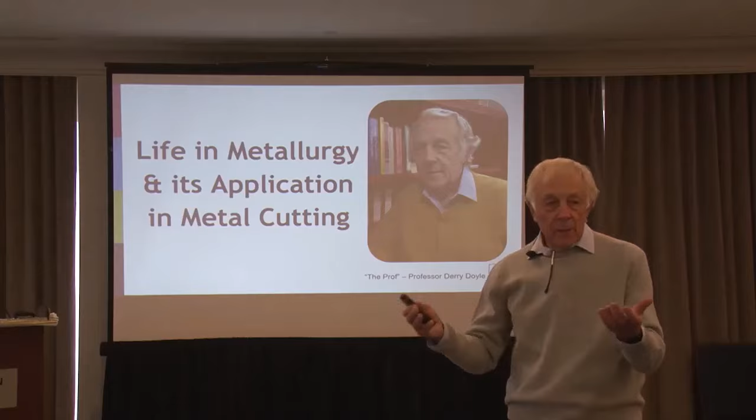Interestingly, metallurgy, metallurgy, we say things a little bit differently. Let me tell you a little story. When I was in Minneapolis with a great friend of mine, Professor Ramalingam, we were having lunch, and as I moved through the cafeteria, this lovely lady said to me, would I like some tomato with my lunch? I was being a little bit smart and said, well, I'm not sure, but I wouldn't mind some tomato. And she looked at me and said, well, I suppose you'd like some potato as well? So she got me, and that was just lovely. I've never forgotten that one.

So metallurgy, metallurgy. And if we have any other problems, please stop me and ask.

Now let's look at the background for our conversations for the next hour or so. The background, as Emma said, I have a background from the north of England, in particular Wigan, and... Hang on, let's do that bit again. Just go through the structure and then go into the background. Oh, okay, go through. Tell them what you're going to tell them. Go down and then go. And then go background. Okay.

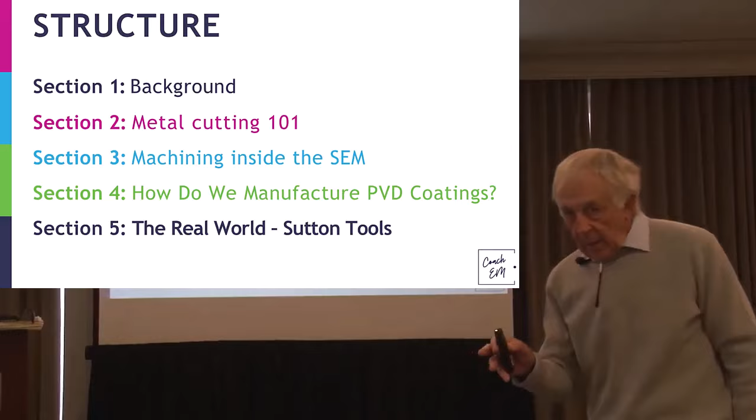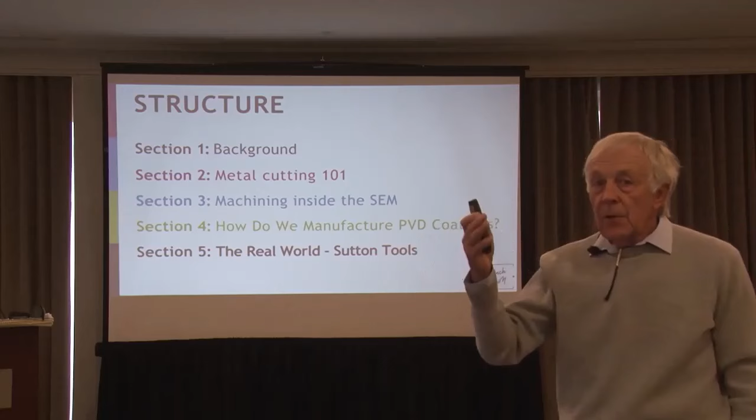Okay, the structure for this morning then is the background. For me, we're going to look at Metal Cutting 101. What do you find in the textbook? What does it say about cutting metals? And we're going to take something a little bit different, a little bit original, that we've got some sort of reputation for, and that is machining inside a scanning electron microscope, meaning we can look at the dynamics of chip formation at very high, 10,000 times magnification. And then how do we look at making coatings, PVD, physical vapor deposition, making coatings from the vapor state, and then we take all that into the real world, into Sutton Tools.

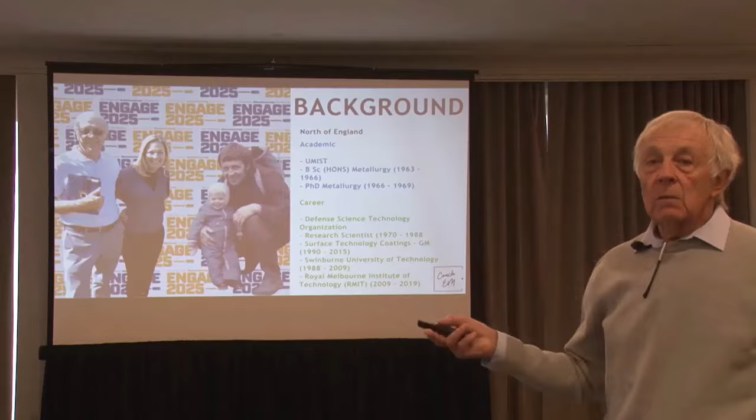Now, my academic background: I did my degrees in metallurgy at UMIST, University of Manchester Institute of Science and Technology. What a brand name, doesn't exist anymore, it's now just the University of Manchester. Big mistake in my view. Now, at UMIST I did a BSc and PhD in metallurgy.

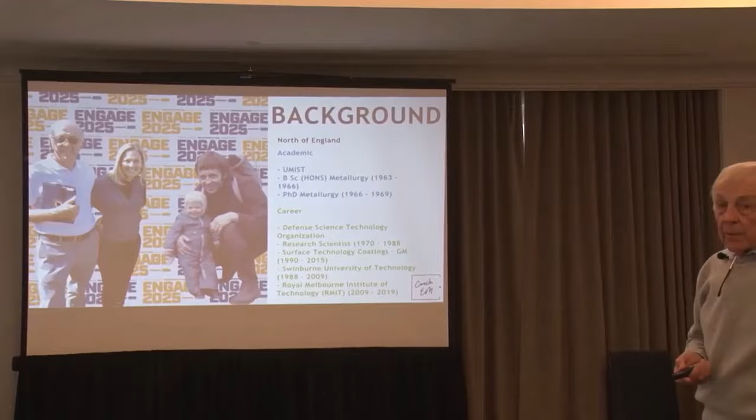My career from there was in defence in Australia, the Defence Science and Technology Organisation, for about 20 years as a research scientist. Then in 1988 I left defence and joined Sutton Tools, and we formed a company called Surface Technology Coatings, which still exists today. I also was a professor at Swinburne University of Technology and the Royal Melbourne Institute of Technology in Melbourne, 2009 to 2019. So that's roughly my career, one academic and two of the real world application.

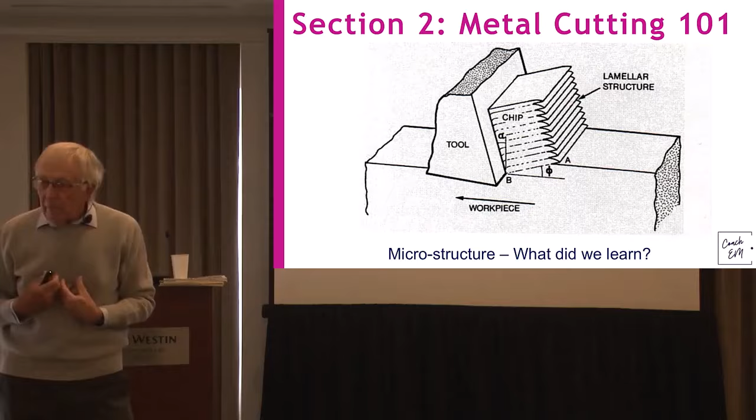So I'm a metallurgist, so it is a metallurgical theme from what I've got to say. In manufacturing, I have been involved in metal cutting, that's what's interested me. I've even done that in the universities, in the Commonwealth Scientific Organisation, in Cambridge, and in the real world. So we've covered everything. So well, let's start at the beginning. And please, hands up or contribute if I'm missing something or something that you've experienced.

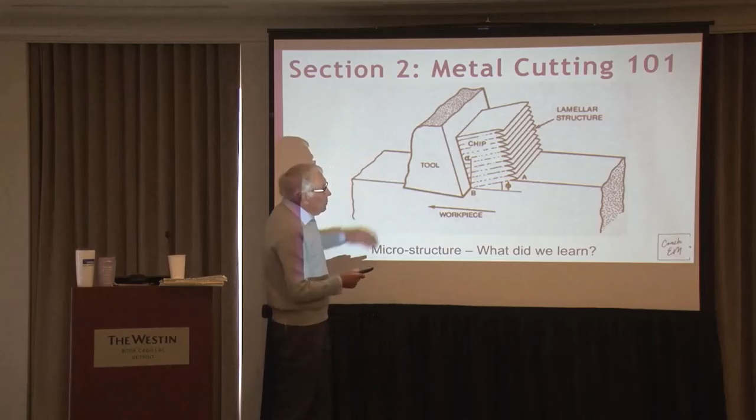This is a typical sort of image you might find in a textbook on metal cutting. Here we've got a cutting tool, there'd be a planing operation. We've got the workpiece and the chip, so they're the three things. The workpiece for us at the moment will be mild steel or copper or brass. The cutting tool, from where we are going, we're mainly talking about high-speed steel or tungsten carbide cobalt. So carbides, high-speed steel. Remember, as far as that cutting tool is concerned, we started off in the 1700s, 1800s with plain carbon steel tools, and they're very hard. And if you're a heat treater, do you remember what your heat treatment is for a plain carbon steel? You harden at about 800 to 900, you quench, and then you temper at about 200. Okay.

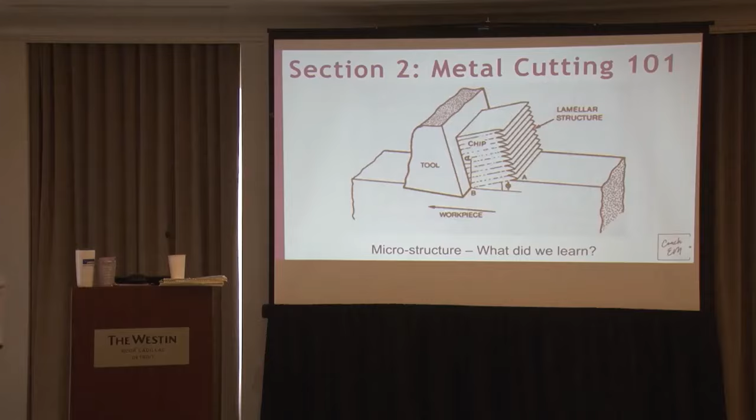Cutting speeds were 10, 20 feet a minute - not very much, but pretty good if you're in 1850, in that late 1800s. Americans played a big role - I got in trouble once for giving a talk saying it was all Americans, and got told off because the English also did a lot in heat treatment, what's called Mushet steel. But I think Taylor and White at the Bethlehem Steel Company made tremendous progress with what we call high-speed steel.

The composition was 18 tungsten, 4 chromium, 1 carbon. What's clever about Taylor and White, around 1900-1910, is they took the steel and hardened it not at 900, which everybody had been doing for 100 years - they went up to 1200. And when they tempered it, they didn't temper at 150, 200 - they tempered at 450. Those subtle changes didn't happen overnight, but they were tremendously important, and that high-speed steel is still one of our main tool steels today.

What's important about it is its ability to withstand the heat as that chip moves - does it slide? That's still very, very controversial. As that chip goes up the tool, it starts generating enormous heat, so that tool has to withstand the heat of sliding friction.

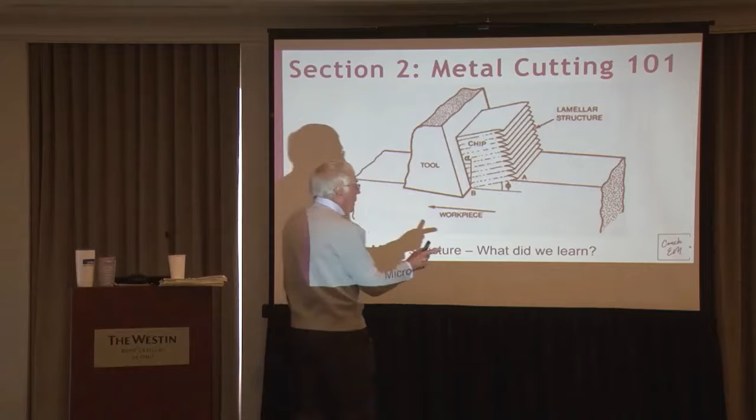I'll just say one thing, but you'll see it more. The intense deformation along there is important, and it's something I've written papers on - it's taken metallurgists a long time to really understand what's going on. But let me make one point: as the workpiece is coming along, there's an enormous normal force. If we're talking friction, that's an enormous force along there, and it's got to move up.

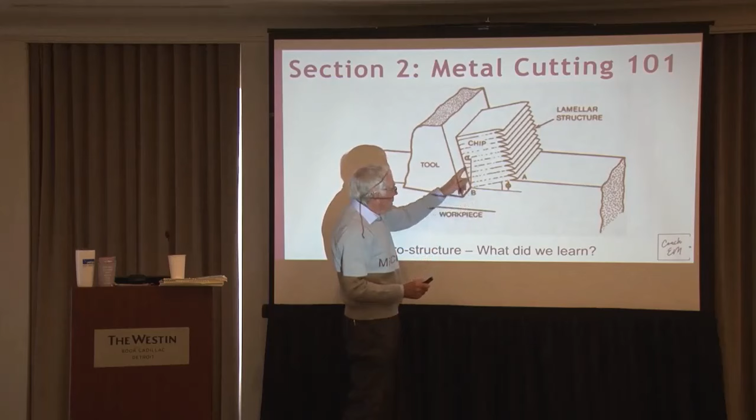It's not seeing any oxygen, and that's important to recognize. So when you're throwing your lubricants and oils at that area, you're lucky if you can even get in there - that's why you use pressure.

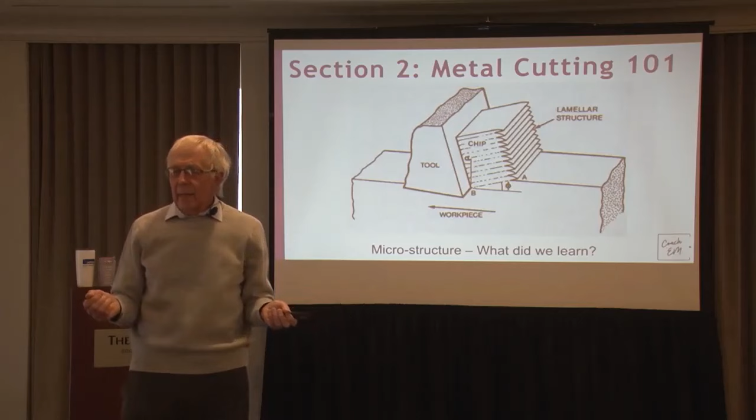Okay, now what does the metallurgist do? He or she comes along, starts cutting it up and looking at the microstructure. We love microstructure. We'll take a standard look at the microstructure, and what do we learn from that? A bit of 0.1% carbon steel, a nice bit of mild steel.

I like this one. We were very, very good metallurgists in the research labs I worked at - we had a super metallurgical laboratory. You see what we were saying about the deformation in the chip? You can see the shear, what we call the shear plane.

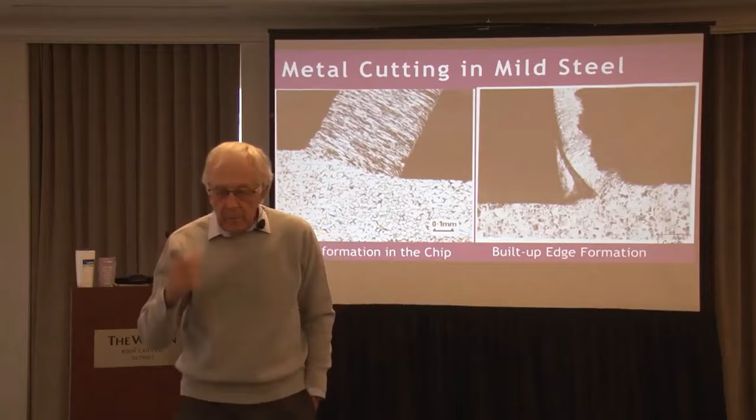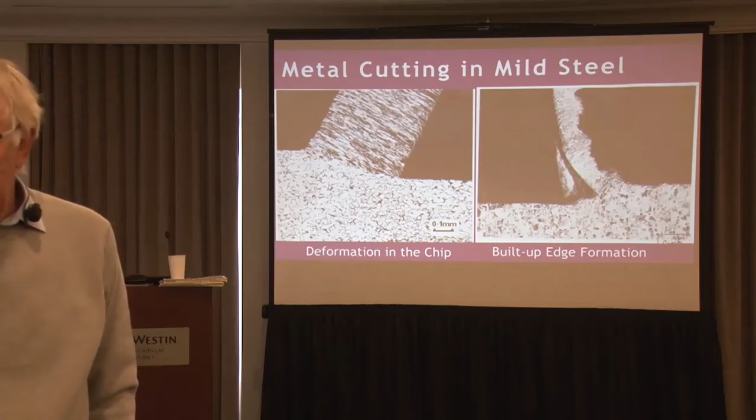Anybody know what the dark bits are? Porosity? No - I'm partially deaf, sorry. It's not porosity. It's pearlite, a mixture of iron carbide and ferrite and iron. So this is a real quality steel.

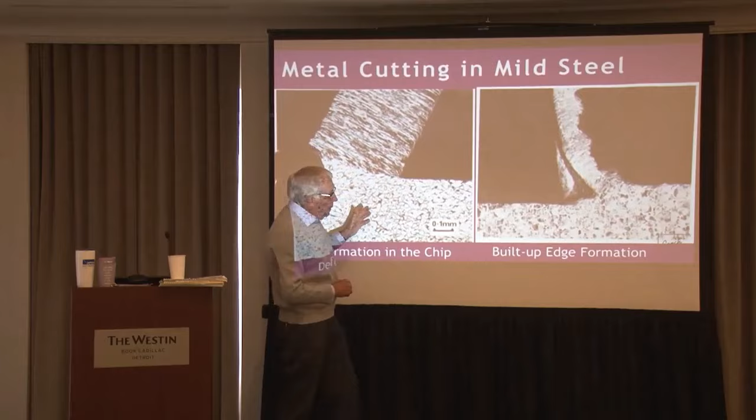So that's a good image of the chip formation. You can see a little bit of deformation as that chip was trying to move up the rake face of the cutting tool. Now quite often, that will break down and we'll see what's called a built-up edge, this thing here. We're going to see a lot more - next one.

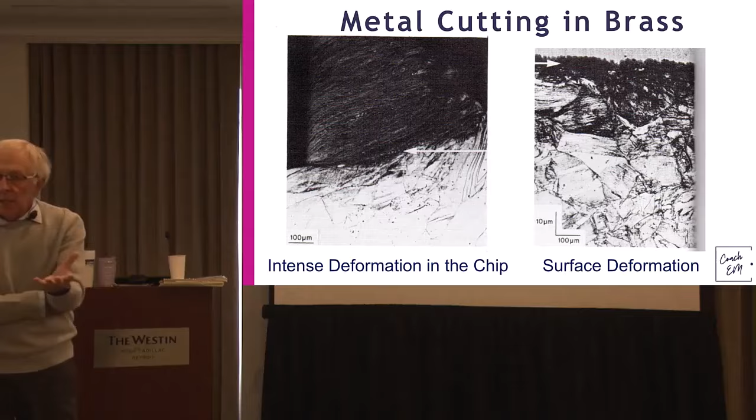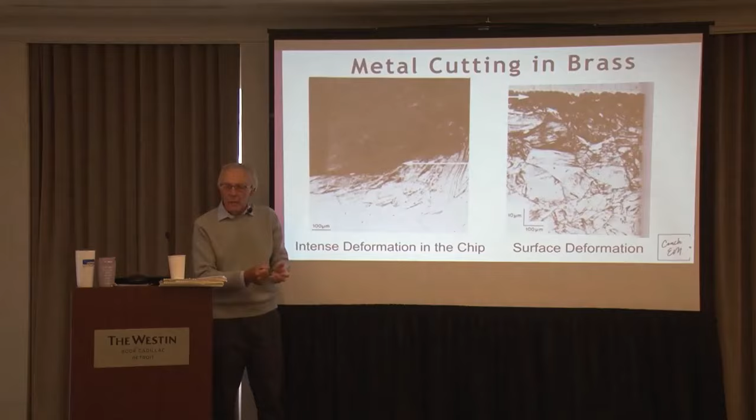Now this is metal cutting in brass, a 70-30 copper zinc alloy. What's interesting when you look at brass is we've etched this in ferric chloride, which brings up the deformation, this dark etching. Look how thick the chip is - so actually, a nice soft bit of brass can be quite tricky if you don't get your geometry right.

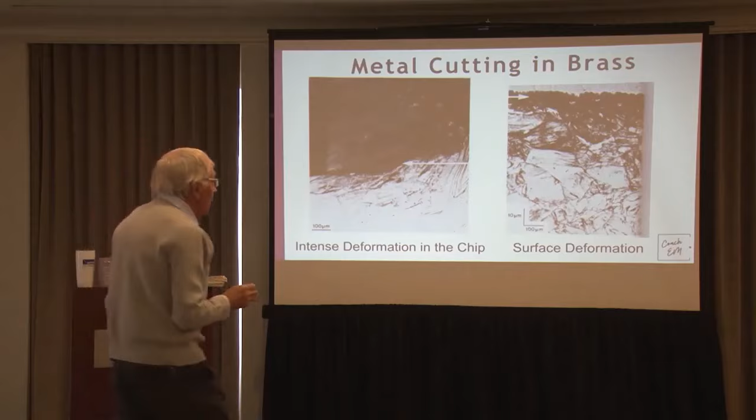And what's also interesting about brass is the deformation in the cut - this is the cutter going that way, or the chip going this way. Look at the deformation under the surface. So when you machine things, you actually deform the surface that you're cutting. If you're making critical components, you've got to recognize there's residual stress in that surface - this is the surface damage. In fact, what we often do in machining is rough cut, and then finish machine.

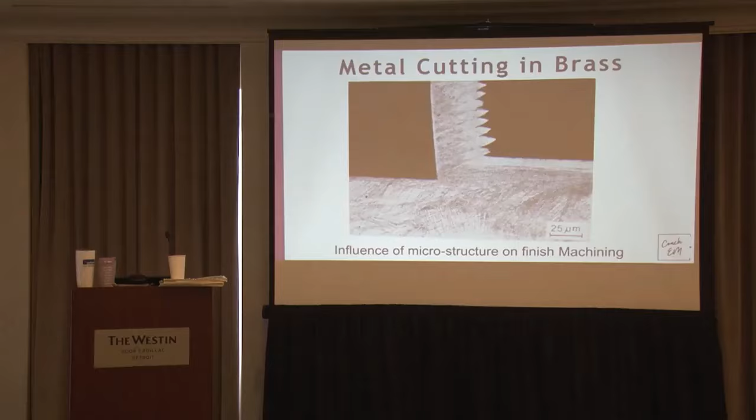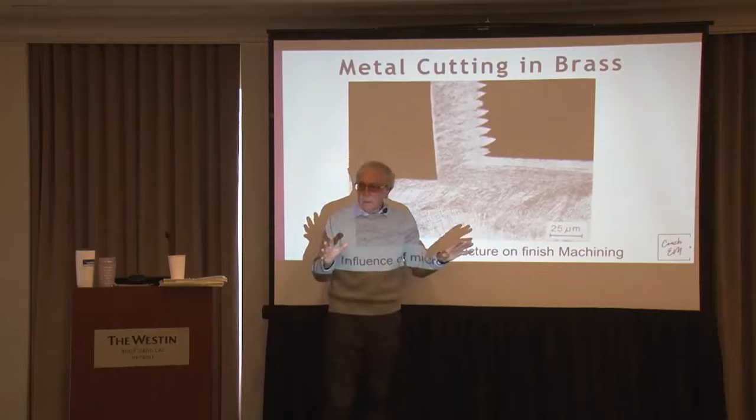Finish machine through this, and we'll see. I think that's classic metallurgy. Here is machining in brass, but it's machining through a heavily deformed layer. And look at the chip - quite different, and the surface finish is quite different.

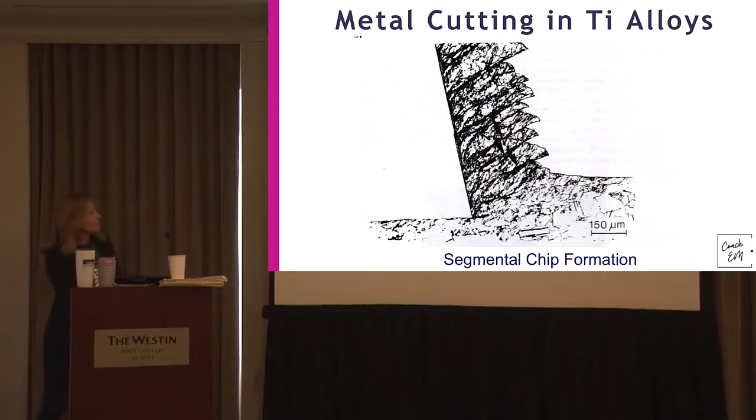Okay, and the last one is titanium 6 aluminium 4 vanadium. Again, we were defense, so aerospace industry. And you see segmental chip formation, not continuous chip - quite a different structure. Okay, that's a classic bit of metallurgy.

Now, so far we've looked at static images because that's what we do as metallurgists. Now, what about looking at the dynamics of chip formation? How do we do that? We machine inside a scanning electron microscope.

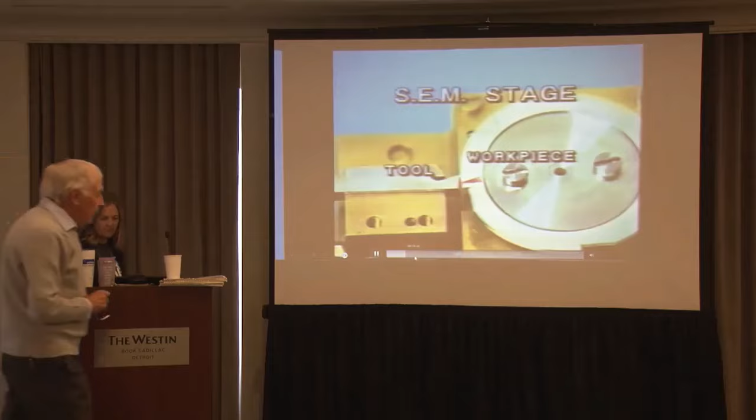Okay, so chip formation, don't worry about that for a minute. Let's just go. And here we are - we've got our cutting tool, high-speed steel. This is the stage - it's a disc about 50 millimeters, 50 centimeters.

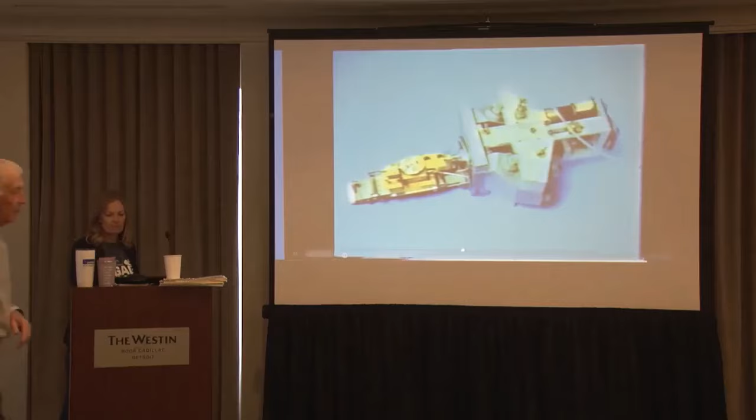Now this all goes inside a scanning electron microscope, and there's the drive, driving the disc against that cutting tool. There's, God bless her, Veronica. She said, well, you know, we've shown this video all over the world - she would want a different dress. I mean, you know.

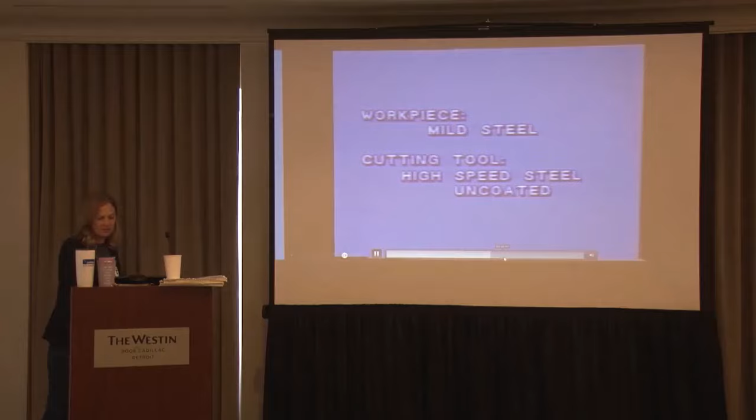Okay, and that's a very old scanning microscope. So don't forget, we can look at the tip of the cutting tool at 10,000 times magnification. Okay, so let's start - mild steel, high-speed steel. That's, I'm sorry about that, that's a little bit of dust. There's the carbides, and we're cutting nicely, getting a bit thicker now, and then we've cut into the built-up edge. Okay, notice this actually becomes the cutting edge, and it's cutting itself.

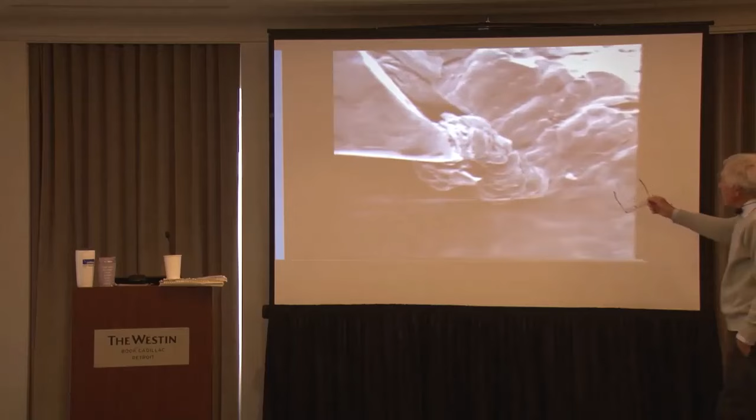There's an inclusion, and then that will start to go - so that'll affect your surface finish, but the cutting edges do no cutting. Is it like that on any material? Sorry, is it like that on every material? No. Okay.

So there we've taken high-speed steel and we've been cutting a bit of mild steel. But what we're going to do next is coat the cutting tool with a PVD. What does PVD stand for? Physical vapor deposition. PVD.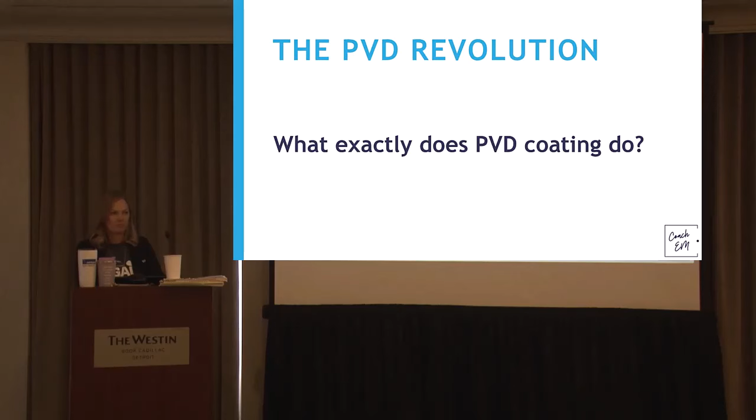The PVD revolution, that's about, for me in Australia, about 1980, where we start to look at putting coatings on cutting tools. And given that in Australia we've been looking at friction, at those mild steel pictures, we were looking at modifying the friction in metal cutting and improving the performance of our cutting tools. Because that's what we're here today, is about performance of cutting tools.

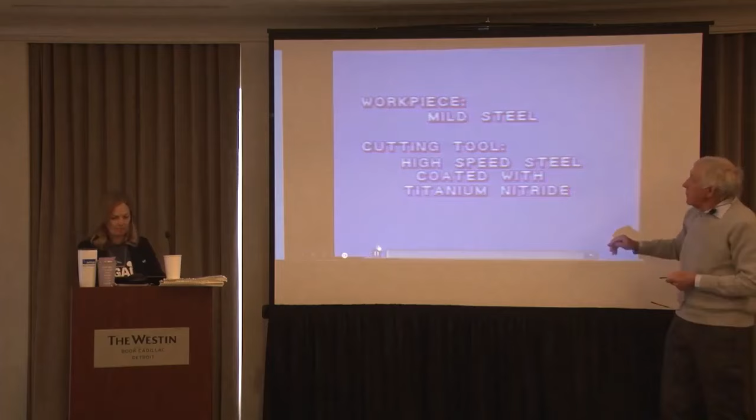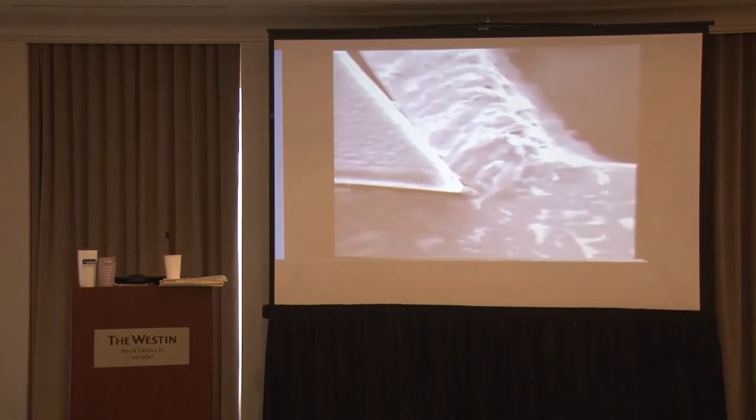We'll say more about the coating in a minute. Wow, okay - I know it's not yellow, the electrons are not colored. All right, so you've got to take that that's yellow. And now just look at this - what I love, I love the image of this anyway, but look at the nose radius on the cutting tool. Still, it's acting as almost a little mini built-up edge, which must affect your surface finish.

But it's hard not to start - if you have an infinitely sharp tool, it's not going to stand because it'll break. It's great going to work and doing things like this when it actually works.

What year was that footage? 75. 1970s, late 1970s, yeah. I had a great little team, by the way, doing this. This is an electroslag refined steel. We were defense, remember.

Very different. By the way, this is the uncoated one, isn't it? Yep, yeah. Oh boy, it's struggling - look, the forces are very high. This is done very slowly.

Electroslag refined steel - we've refined the steel. We're going to make gun barrels out of this stuff. Okay, so you want quality steel. But in that quality, in removing the inclusions out of the steel, it's a lot more difficult to machine. So this is an uncoated tool, plain. Look at the shear plane and the cracks that are forming - very difficult.

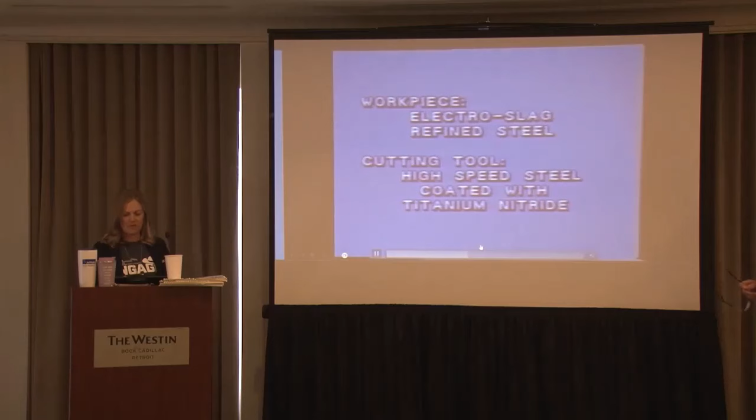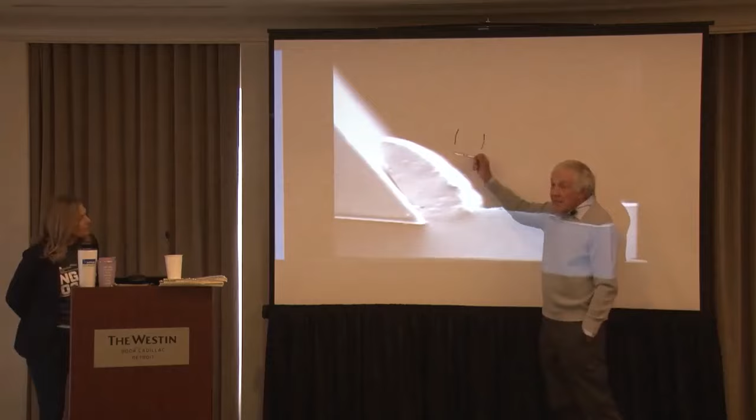Again, look at that, movement up there. This is in vacuum, by the way, there's no oxygen here. Moving beautifully. It'll still crack a little bit.

That's why this was a revolution in metal cutting.

Again, you see that nose radius effect. You won't find that in the textbook. Yeah, and it's sliding, it's moving, there's a crack, off it goes.

Right, okay, next one, last one. Stainless steel, austenitic stainless steel.

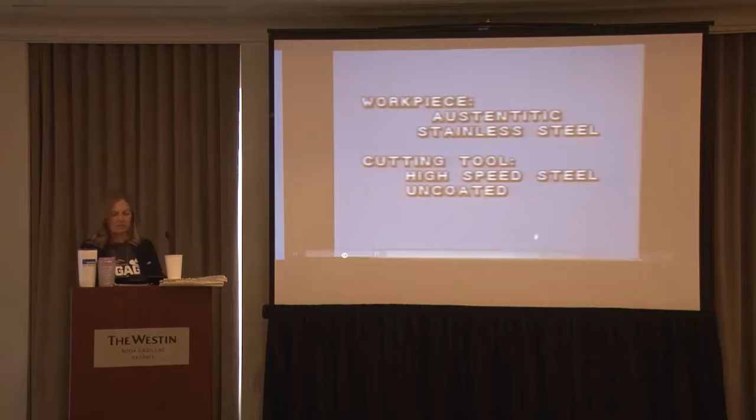Uncoated, huh. That's about as bad. It's another example of a relatively soft steel. They're not easy to machine. In fact, it wants to get round the cutting tool rather than go up the rake face.

So your question about the different material, perfect, isn't it? And now titanium nitride. If you put titanium nitride on, you start to cut the stainless steel quite nicely.

Stainless steel, where was that invented, developed? Anybody? Stainless steel. Germany? Germany? Italy? I'm English, come on. England, about 1920s.

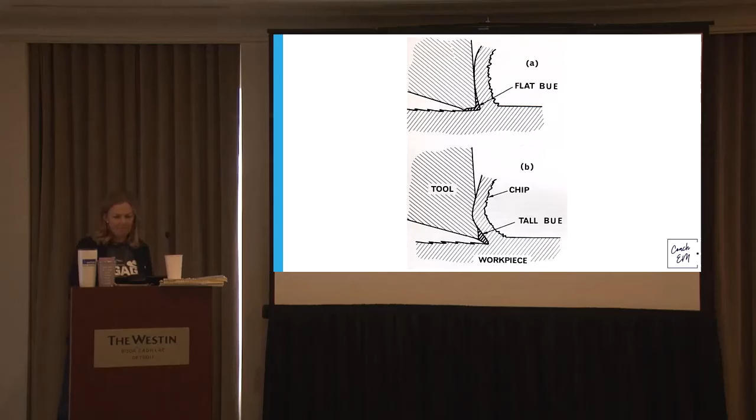And also we're talking about 18-8 stainless, 18 chrome, 8 nickel. And so it must have been some very clever research they were doing in, which town would it be in England? Sheffield - you know, the knives and forks, they're generally stamped with Sheffield on.

And you know what? They were making gun barrels, okay? They were experimenting with chromium. And one day they were increasing the amount of chromium in their steel, and they got over 12%. And it was lousy gun barrels, so they threw it out.

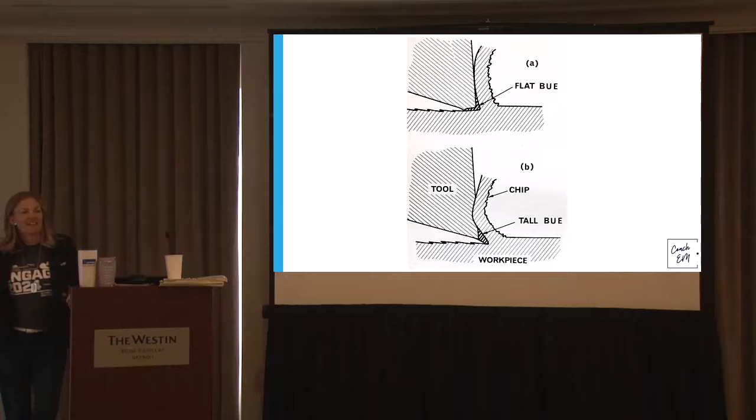Now it rains a lot in Sheffield, okay? And six months later - not the man who's credited with discovering it, he got the credit, but it was his technician - came in and said, 'Hey Harry, that steel we were working on' - I'm trying to do the Yorkshire accent, I'm not very good at it - 'everything else is rusty, but it's not.' They'd thrown it out, and it was as bright as six months ago. And that was the discovery of martensitic stainless steel.

Okay, you've only gone two hours. I'm 28 hours from bloody flying from Melbourne to here.

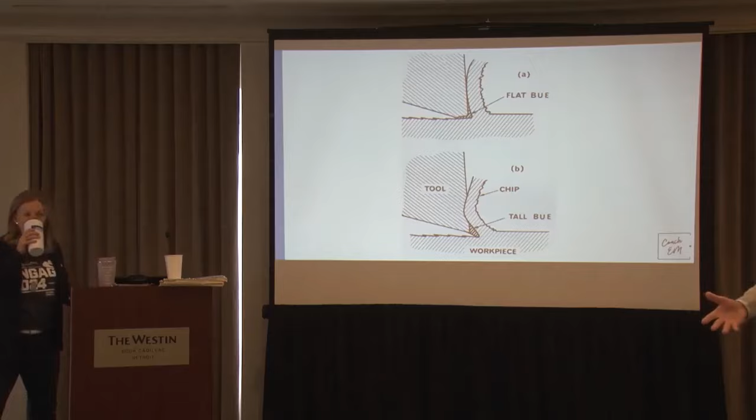Okay, this one. Oh, that's right - remember when I did that work when I got to Melbourne and we under-hardened the high-speed steel? We didn't know why it worked, but we know now.

Now we know a lot more about this thing, this built-up edge. So when the tool starts to wear, because we've under-hardened it, it creates this prominent edge. So it wasn't wearing out, so the tools were lasting a hell of a lot longer.

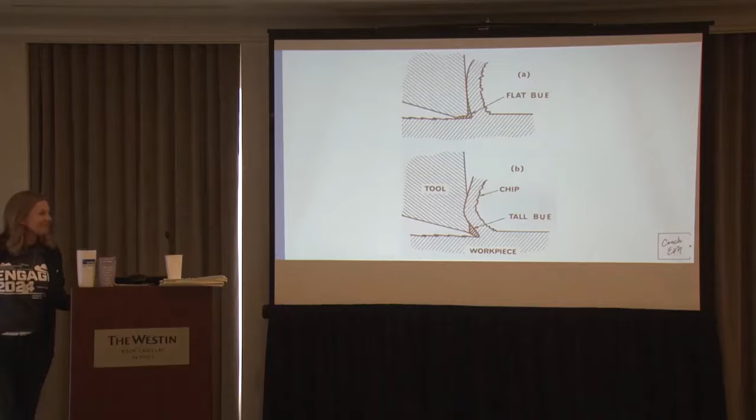For this particular application, it was what we call a spheroidized low-carbon steel. Very soft, very ductile, okay? So that actually worked for us, okay?

This PVD, and I've just mentioned titanium nitride. So has everybody heard of titanium nitride? Yeah? Okay. By the way, what sort of material is titanium nitride? Anybody? It's not a metal, not a plastic, it's a ceramic.

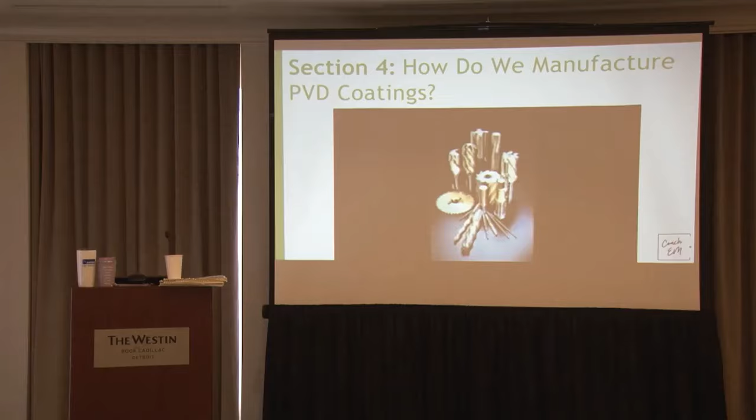What's the definition of a ceramic? A metal and a non-metal. Titanium, nitrogen - we're putting two together. Ceramic, aluminium oxide, tungsten carbide - these are ceramics, metals and non-metals. They're hard to manufacture, in other words, high temperatures, but they're very hard.

So that's why we want them on our cutting tools. We want hardness at high temperature. Okay, so how do we manufacture a ceramic from a vapor state? Let's look at that, okay.

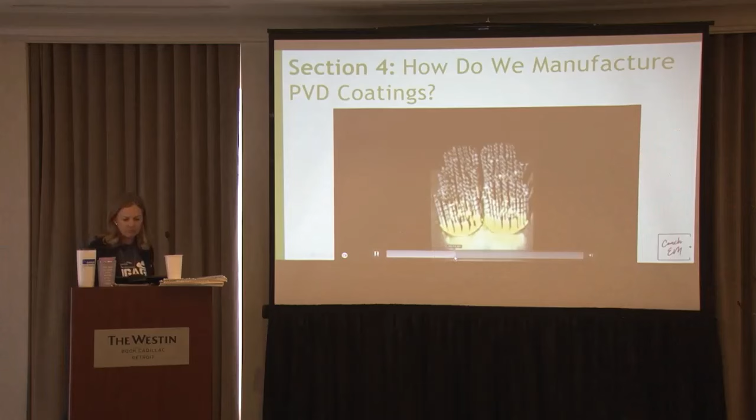So here's our drills in the holders that's going to go into a chamber. And this is the machine that we purchased for one million dollars in 1988. That's the chamber.

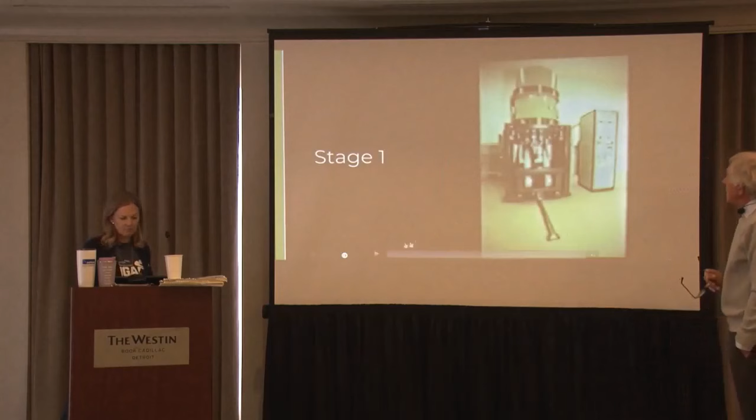Drops down, pulls out, and you load. We're going to look inside the chamber so we know what's happening. By the way, we've still got that machine operating.

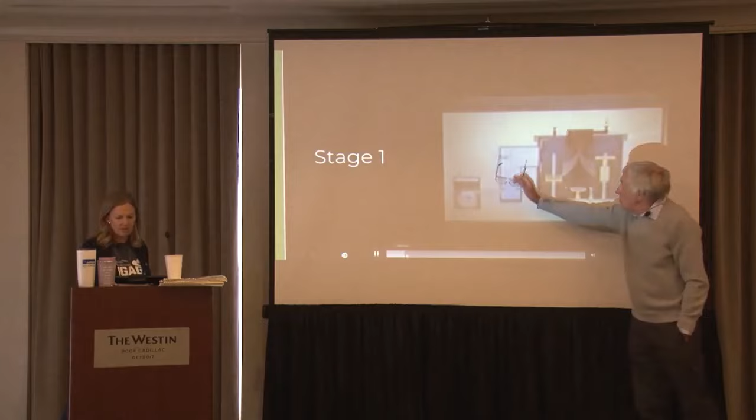Here we are, it's in a vacuum, rotary pump and diffusion pump, so it's a vacuum system. And what we do is we generate electrons, and with the electrons we heat up the cutting tools on those spindles. There's about a dozen spindles in that chamber.

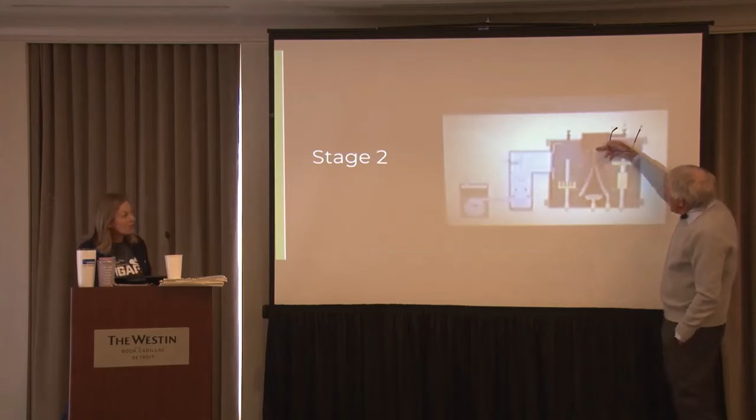Then we focus the electrons down onto a copper ring down here. And what that does, we let in argon, and it creates a plasma, energetic argon ions. And those argon ions start hitting the tools and cleaning them atomically. So we want clean surfaces.

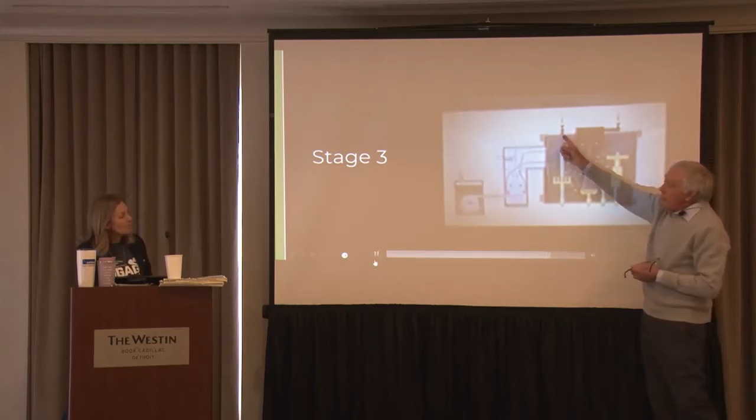And then the last one, we focus the electron beam onto titanium, and we melt that, and we let in nitrogen, a reactive gas. And that's 2 microns - look how dense and uniform that coating is.

So notice what we've done there is it's all about creating a metal vapor, PVD, physical vapor deposition. It's about creating a metal vapor and then a reactive gas to bring the two together.

Now, you're limited to maybe 2 or 3 microns, because if it goes any bigger than that, it just won't bond to the surface. So you've got limited thickness. Now, there are other ways. By the way, I'm sorry to say, that was a Swiss machine.

I remember meeting a guy called Peter, he's probably dead now, a guy called Peter Flood from Ionbond or Multi-Arc, which is the American system.

It's another story. Shut up, Derry.

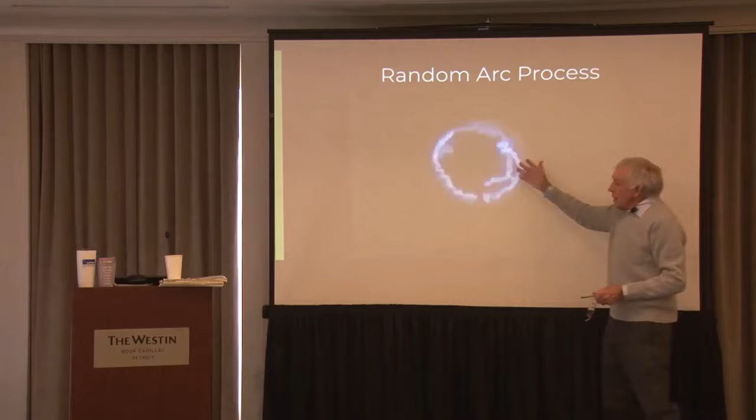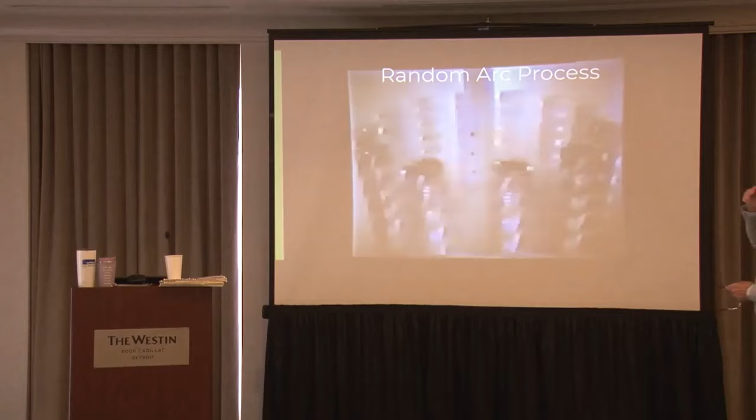This is my favourite, look at this. I love this one. You can see the way you'd use it with the great system. You use an electric arc, and it's blasting out this intense vapor of titanium, and there you can see the tools being coated in the arc process. Now, if I can just hold up for a second.

When we're evaporating titanium, say titanium nitride, but now we've also got titanium aluminium nitride, that made it a bit harder. Titanium, well, it's not so easy in an evaporative system, is it? How are we going to melt titanium, melt aluminium? The arc system is brilliant - there you can run the arc on a cathode with titanium and aluminium.

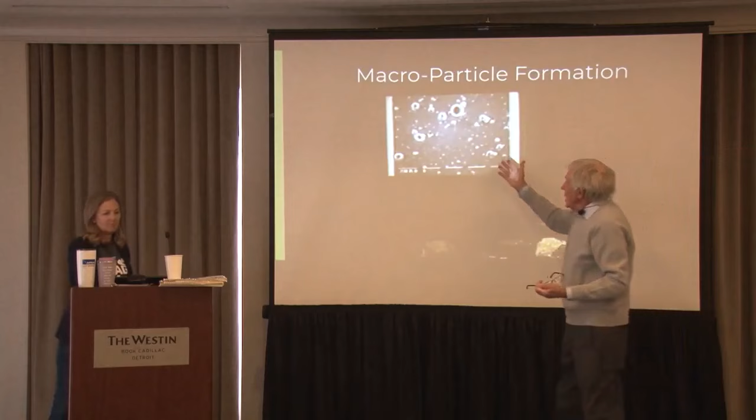Only trouble is the intensity of the arc gives you lots of macroparticles. That's the bit that I don't like. And when you look at the evaporative systems, it's much smoother. So in tapping, I think I prefer that. But if you're milling, the arc is great.

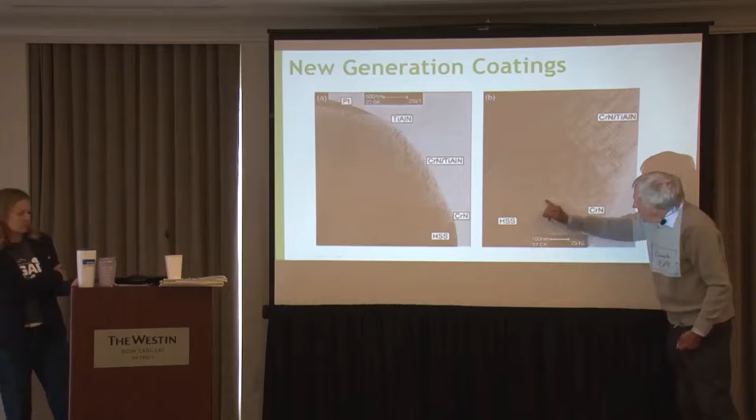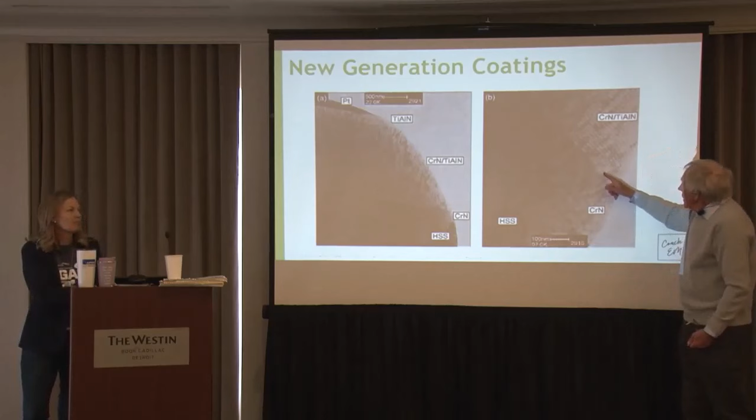And the last thing that the arc can do - let's stop this for a second - I think this is the new generation of coatings that we'll see. There's the steel, this is chrome nitride, now look at this. By the way, 100 nanometers. We've got chrome nitride, titanium aluminum nitride - multi-layers.

So I think the possibilities for this are really fabulous, I'm too old now, I wish I was still doing it because there's fabulous technology here. Okay, fine, we're at now, let's go into the real world.

That's by the way, in all that - I spent 2 years in Cambridge. Cambridge, you know, brilliant, enjoyed every minute of it. Worked with a guy who's now in San Francisco, Greg Horne, fabulous guy. Anyway, we used transparent cutting tools, so we could actually see.

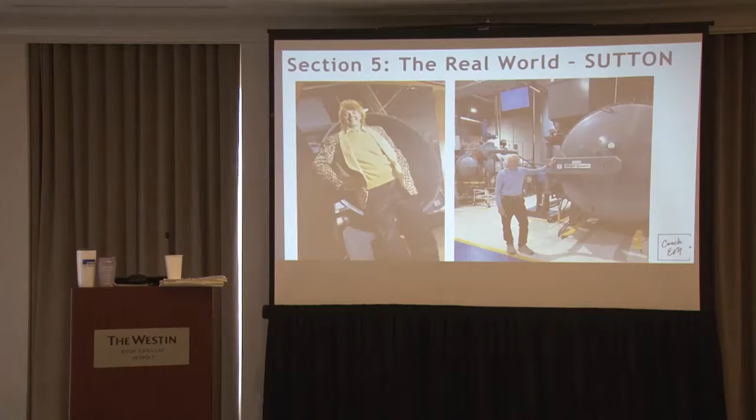Now, Sutton Tools, a family-owned business, 4th generation - that's unusual, 4th generation Sutton Tools. I noticed, by the way, they call themselves Sutton now, not Sutton Tools. When I was there, it was Sutton Tools. It's a family business, started in 1917, and I worked with Jim Sutton, great mate.

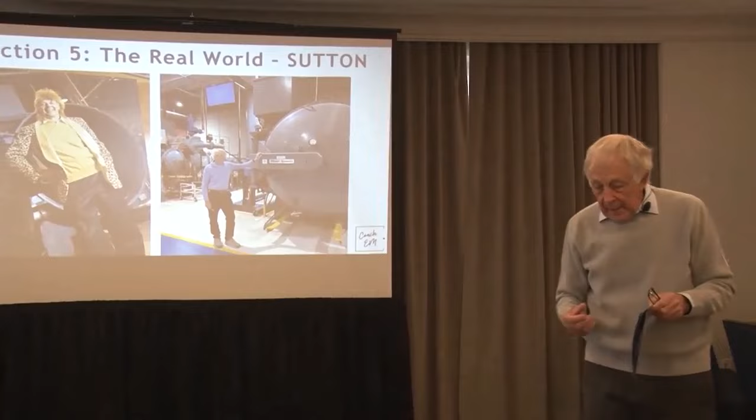We used to play golf together. Jim kept saying, Gary, we've got to get you into the real world, get you out of that research stuff. And bloody hell, Jim, you should have left me, for God's sake, eh? The real world's great, but it's got challenges - you've got lawyers and all sorts of problems, right?

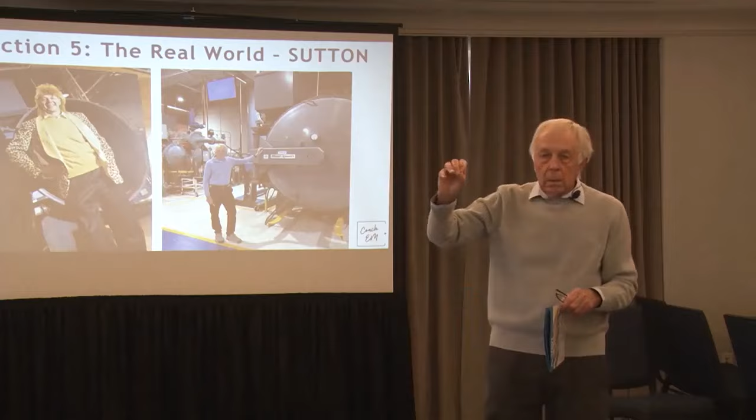We started a little company called Surface Technology Coatings in 1988. I wasn't the general manager at first - it was complicated. Two years later, I was made general manager, and I was dealing with lawyers at 2 o'clock in the morning. Why? Because we were in receivership.

Do you know what the interest rates were in 1990? Have a guess, anybody? 18%. 18. You try running businesses on borrowings on that. So it was a challenge.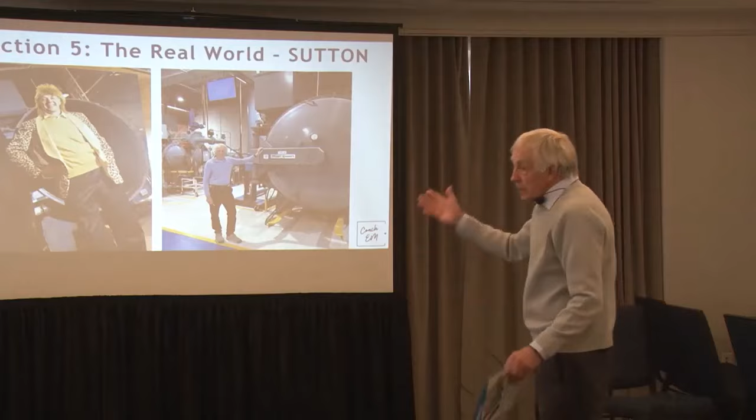We got through all that. I was general manager for the next 15 years of this small section. And in that - American, Abar Ipsen, by the way - this is the vacuum heat treatment furnaces.

That was 2 weeks ago, me. That was about 10 years ago, me being a fool, dressed as Rod Stewart.

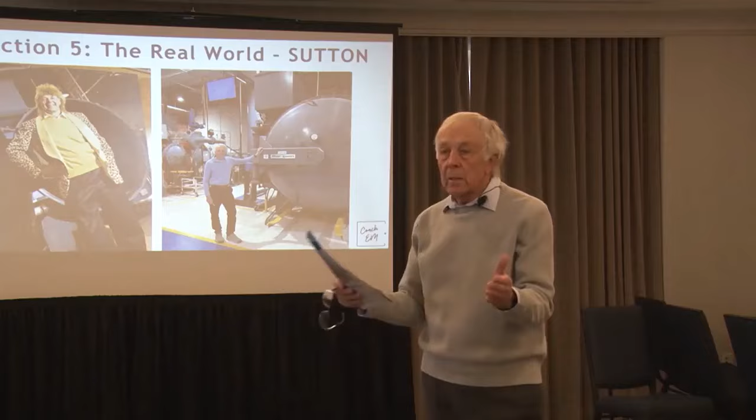And just a point there, by the way - I was general manager and I was a professor. That's how this damn professor thing comes up in one of the technical universities. So I combined two things. It's complicated how that happened, but it did.

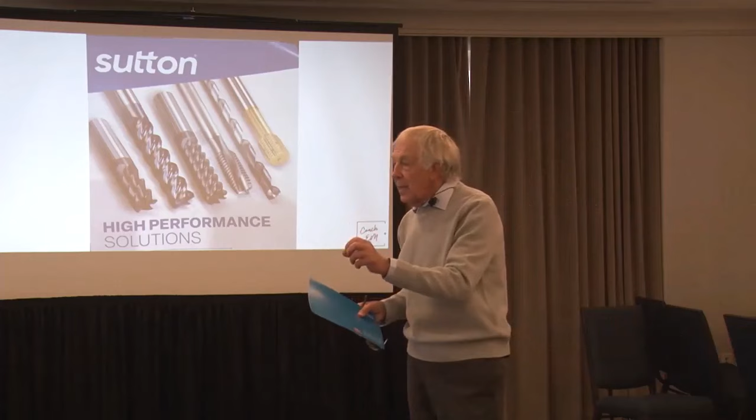And that day I'd given my last lecture to 200 engineering students, and I went in dressed as Rod Stewart. Now, I was the sort of lecturer that expects people to listen - if students don't listen, I'll get out, you know. So to say they were surprised when I walked in dressed like that was an understatement. But what was good about it - I meant to go in just to get a reaction, but I did a 2-hour lecture dressed as that, and at the end, I got a standing ovation.

I mean, it was a Mr. Chips experience - that's the movie, Mr. Chips. It was fabulous, I really enjoyed that.

Okay, so Sutton Tools - this is Peter Sutton, you can see the next generation coming through, a good mate of mine. This is the research environment.

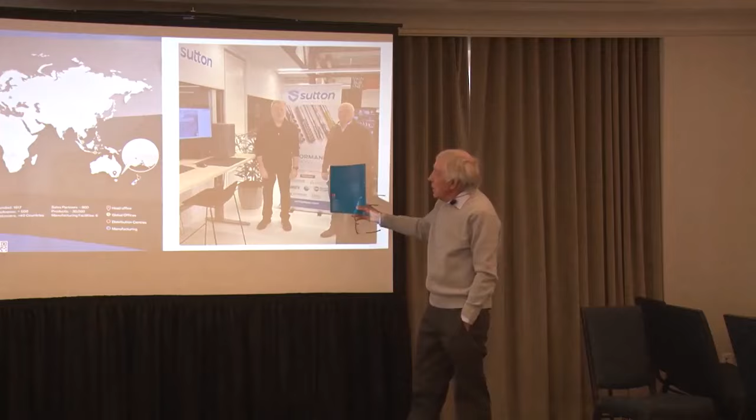And what interests me now is, by the way, Jim and Bill always say I have 2 brothers running this show. There's Australia, by the way - it's a long way. There we are, that's the head office. But you can see the offices all around the world now.

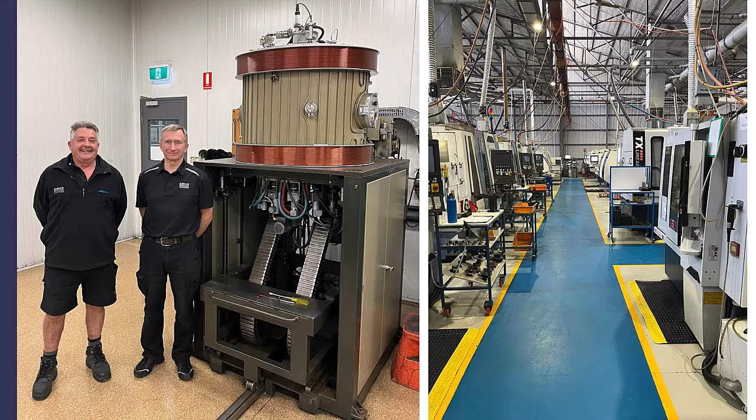Lovely, about 500. Hey, that's good, isn't it? That's the machine we bought in 1988. Sergey worked with me about 1991, and this guy did the heat treatment. They were both about to retire. That was a couple weeks ago, and it was nice to catch up with them. But that machine, look at that - it's doing coatings as well as it did when we first bought it.

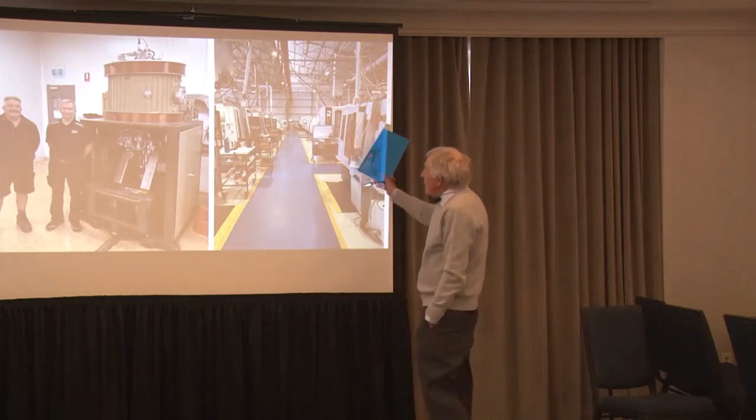The classic environment. A lot of ANCA machines, Australian, which I think is number one now.

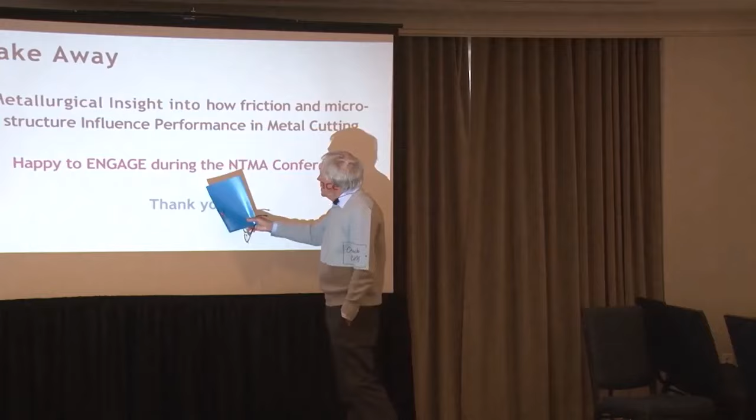So do we have a takeaway? I'd be interested in your comments. But for me, it was gaining metallurgical insight into how friction and microstructure - the microstructure, the way we change microstructure to affect the performance. So happy to engage on that, and your comments on what you've seen. Thank you, so a big round of applause.

We've probably got time for one insight and one question, and then I'll go over to Steve. Anyone? Yeah, thanks, Nick - so what is the difference between metallurgy and material science?

It's a lot of plastic in material sciences - that's a quick answer. I'm not so good, I know a bit about plastics, but when I did metallurgy in 1963, no plastics - metals and ceramics. Good question, but today you won't find metallurgy, you'll find material science, and then they water down the metallurgy. We did 3 years of metallurgy.

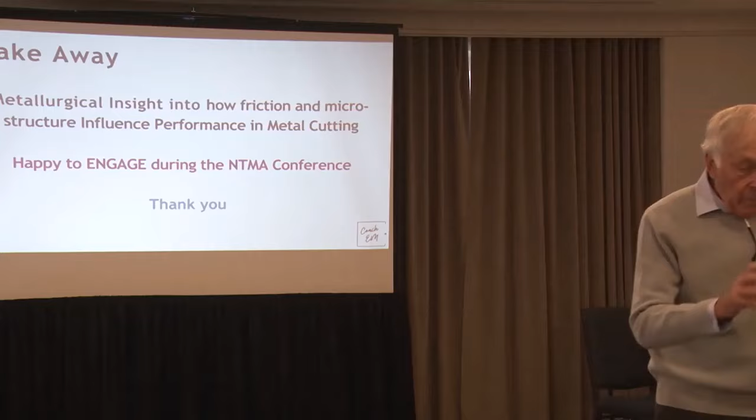And it's a great question, because the number of times I've been fighting in heat treatment with bloody Europeans - you're making die blocks for plastic molding or something, and the bloody thing cracks in America. This happened to me, and we've got to figure out it's your heat treatment, because the heat treater is the last one to deal with that block of steel. I remember there was an Italian - I go over to Europe, I've got this Italian, he doesn't know anything about metallurgy, he's using words that are wrong. So, either you know your metallurgy or you don't. If you don't, shut up.

An insight? Someone? I just thought it was interesting to see that zoomed in build up, because we all know we get build up on tools. Seeing it zoomed in like that really shows how much build up you can get, causing the surface finishes to be rough.

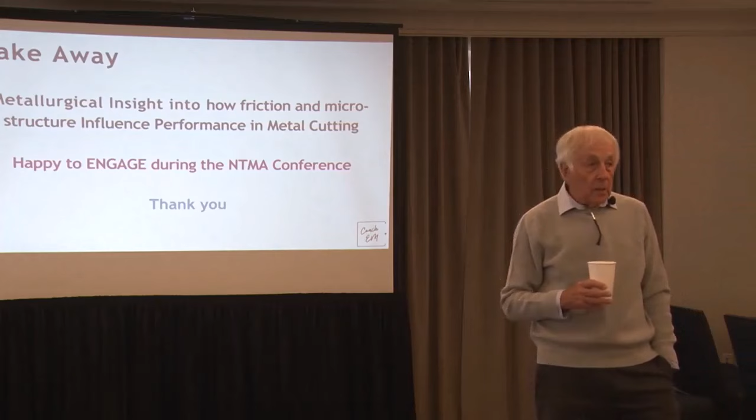And Dad, James is the gun guy - gun barrels and guns. So are you using electroslag refined steels? We're using like 17-4 stainless mostly, is what we're using right now.

So I got a question. When you were doing your tests on that, when you were showing it magnified to 10,000 times, did you use your surface footage and your chip per tooth figures to control your edge? Because you can control the buildup on the edge of a tool by how fast you're taking it in and out of the material.

You're right. I think the value of this sort of stuff is actually getting an insight into what the hell the workpiece is doing, and now adapt your geometry to suit that. Because if you don't know what's going on, it's very difficult to adapt, isn't it? You're flying blind. But that gives you real insight - even the static images are good, but they're limited.

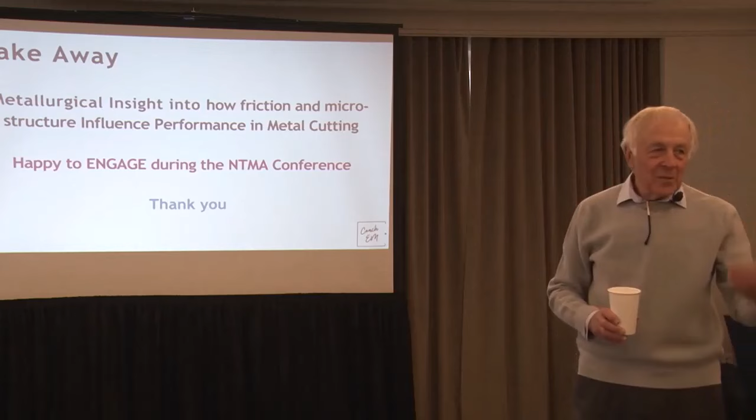It was just fantastic doing that. We had a great engineering shop in our research labs, and I worked with the guy there, and we did fine grinding for 20 years. I loved it, and then I get in the real world - you're dealing with lawyers at 2 o'clock in the morning and people who don't bloody know what metallurgy is.

Positive, coach James, come back. The positive is going to be Steve - Steve's got a few things to say.

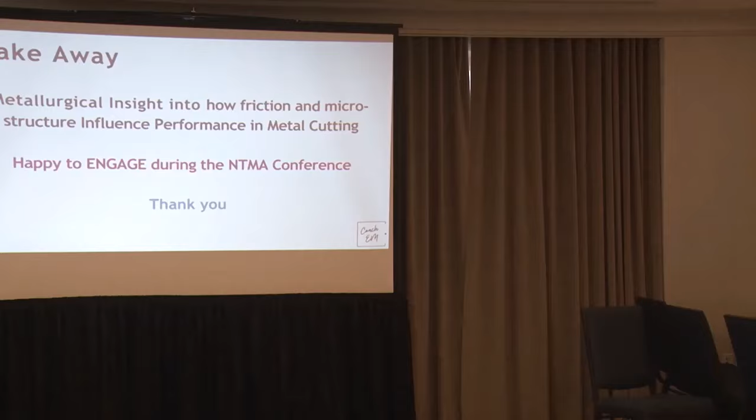And it's Dad's 81st tomorrow. Happy birthday, so happy birthday for tomorrow. Make sure you wish him a happy birthday if you see him - he'll be around, we fly out Thursday morning.